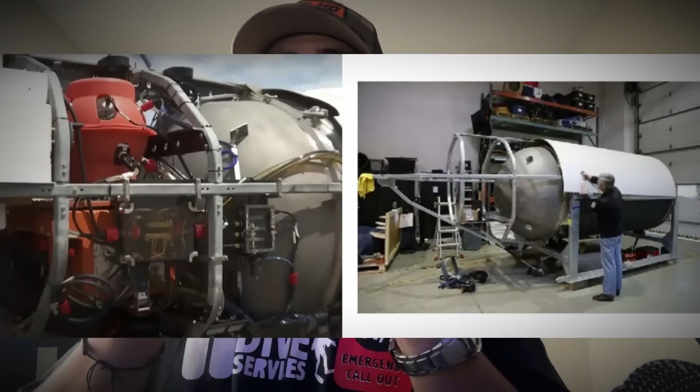Before we get into our investigation, let me explain a little bit about my background. So, I am a commercial diver.

I've worked the past 14 years in the commercial diving industry and the maritime industry. Back in 2018, OceanGate actually reached out to my company directly. They wanted us to essentially provide emergency response dive support for the dives that they were doing in the Puget Sound at the time. From what I recall, at that time, they were doing research with six-gill sharks in the Puget Sound. I remember even back then, they were taking stars like Macklemore out into a submersible. I believe that was the submersible Antipodes at the time. Him and Stockton Rush were down in a submersible a couple hundred feet below the surface in the Puget Sound.

So I really have a unique perspective on what happened here, and it really does hit close to home, not only because they're from the same city as me, but they also reached out to us directly, and we've had contact and communication with them. My personal connection with OceanGate gives me a unique perspective on this Titan tragedy.

Now, this isn't going to be a video about complex engineering details. It's about sharing my experience and shedding light on the events from the perspective of someone who knows the risks and realities of deep sea operations.

As commercial divers, one of the many things that we do is called NDT, non-destructive testing, and that could be anything from ultrasonic thickness testing to visual testing to underwater X-ray inspection on a transducer for the Navy. So there are many tasks that commercial divers do, and we are very familiar with the marine conditions, how different materials react. We often have to put on our investigator hat and try to figure out what went wrong and provide that information in a report to the Navy, Coast Guard, police departments, you name it.

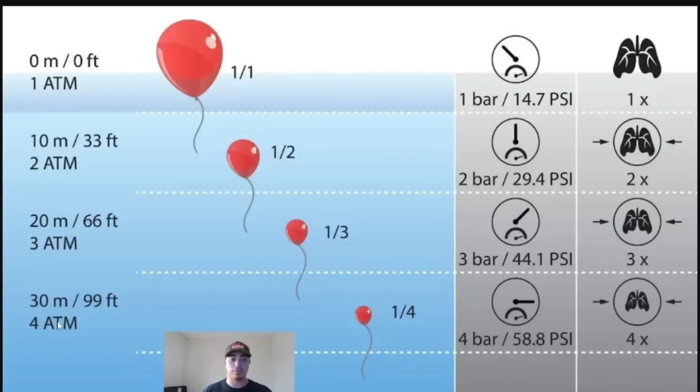So at 4 atmospheres, you're going to have about 4 times the amount of pressure. Now, the Titanic shipwreck was at about 12,500 feet, which is about 6,000 psi, or 400 atmospheres.

So you can imagine that balloon is essentially going to get crushed. Even the material itself—not only is all the air going to get squeezed out of it, but the material itself is going to be compressed.

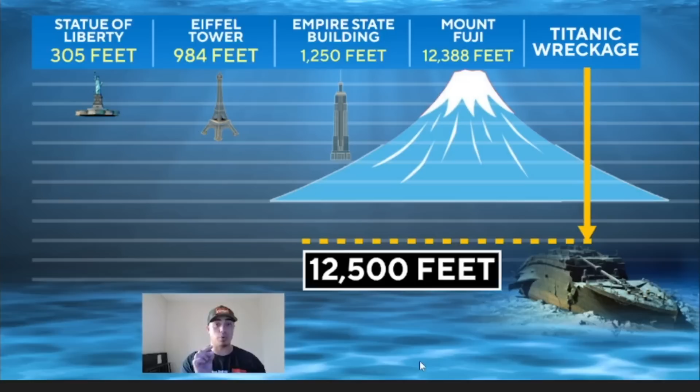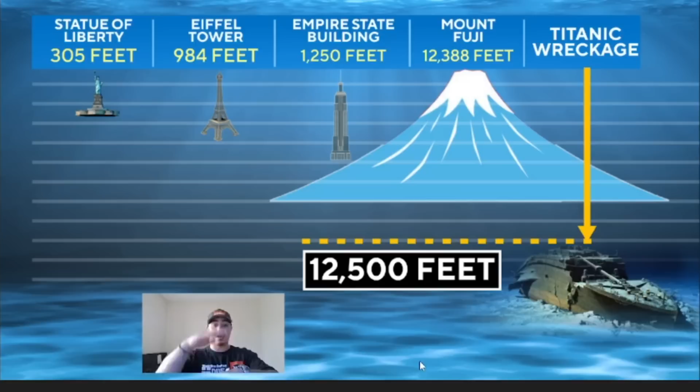At that depth, the human body can't fight off that pressure. Even if you went down there with scuba gear, physically diving to that depth, your skin and everything is just going to be totally compressed. You can't handle that pressure. It's sort of like sticking your hand under a hydraulic press—it's just going to compress everything. That's how much force is behind that amount of water.

So the next thing we're going to look at, they show us this in dive school to help illustrate Boyle's law. In this demonstration they have this traditional diver's suit here—a traditional old school diver helmet and suit setup. A lot of people don't know this, but these old school suits are actually mated to the helmet, so this whole suit is filled with air.

How these work is you have air coming down from a compressor on the dive boat, constantly being pushed through—you can actually hear the air being pushed into the helmet, it's very loud. And you have an exhaust valve right here on your helmet, and that's how you adjust how much air is free flowing out of it.

Essentially what they're going to do is simulate if the hose was cut topside. Inside of this suit, it's going to instantly equalize to the surrounding pressure around it.

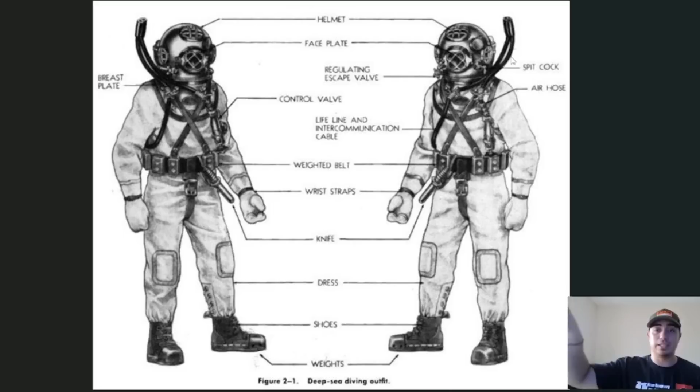Now, to simulate the effects it would have on a human body, they're going to have a dead pig inside of here—this is just for demonstration purposes, since they can't have a human inside. They're going to simulate cutting the hose by opening a valve which releases all the air out, and you'll see what happens with that pressure. So this is Boyle's law here in a nutshell.

So did you guys catch that? The pressure inside of the suit is equal to the surrounding, or ambient, pressure. So he's at 300 feet deep—well, that pressure inside of the suit is going to be 300 feet of pressure, which equates to roughly 135 psi. Okay, that's at 300 feet.

So now that they're at the 300-foot depth, they're going to essentially cut the line. They're going to open this dump valve, and all the pressure inside of here is going to get equalized to the pressure around it at 300 feet. So let's see what happens.

Now, a couple of things here—as you can see, this is a simulation, so it's not instantaneous yet. The air is slowly being released, and it also has to fight its way back up to the surface, which is why it's not as instantaneous as it would be in a real life situation, like with the OceanGate Titan. But here you can see the pig head right here starting to make its way up into the helmet—let's just watch what happens. Remember what I said earlier about human flesh and what it does at pressure.

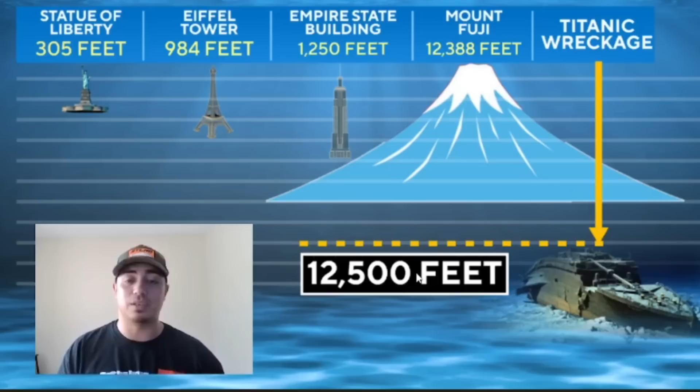Now, did they have warning signs? A lot of people are saying no, they didn't have any warning signs - it wouldn't have made any noise, it would have just snapped and disintegrated. That's what we were told leading up to this.

Now, during this week of investigations and hearings, the NTSB released reports, and we also heard some witness testimony that pretty much confirms, no, they did have warning signs.

Unfortunately, the passengers inside were probably unaware of how severe this was. So, they did have warning signs, and we'll go over that shortly, but let's go over this report from the NTSB - they actually released two material reports.

We're all pretty familiar with the construction of the OceanGate Titan by now, I'm sure. This was actually in the factory when the hull was being manufactured. So how they did this - this is actually once the hull is completed.

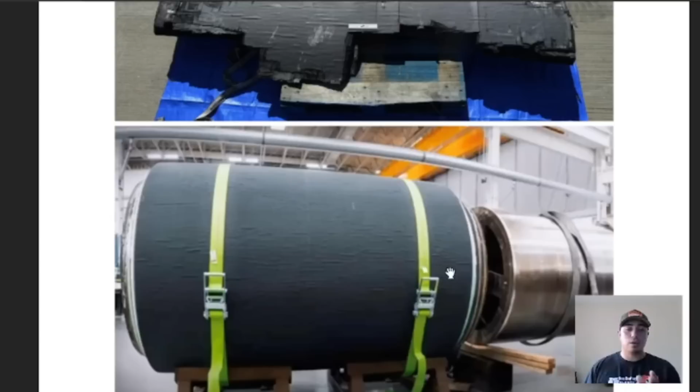They had this stainless tube inside of the hull and then wrapped the hull with carbon fiber, and once it was done being wrapped, they removed the tube. Now, what I didn't know is they did this in five separate layers - five one-inch layers - and you can actually see that here.

Okay, so here's a look at the hull. If you were to cut the edge of the hull off, which they actually did once they completed the manufacturing...

...and kept those ends, which we'll see here shortly, you can actually see the adhesive layers between each of the one-inch wraps of carbon fiber.

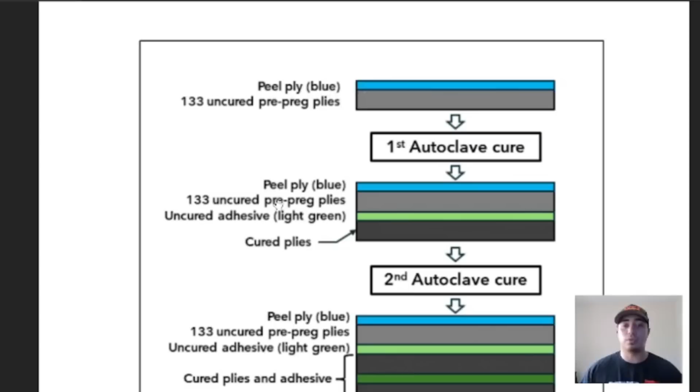So essentially the process was: they would take the carbon fiber, wrap it around that steel tube until it was one inch thick, then apply adhesive, then wrap the next inch, and keep doing that until they had five layers of one-inch thick material.

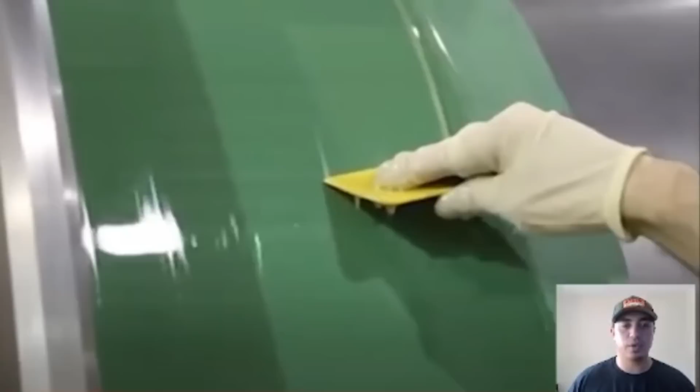Now I'll show you guys something very alarming. This right here is actually showing them applying that adhesive to a layer of carbon fiber, and this is them stringing the carbon fiber on.

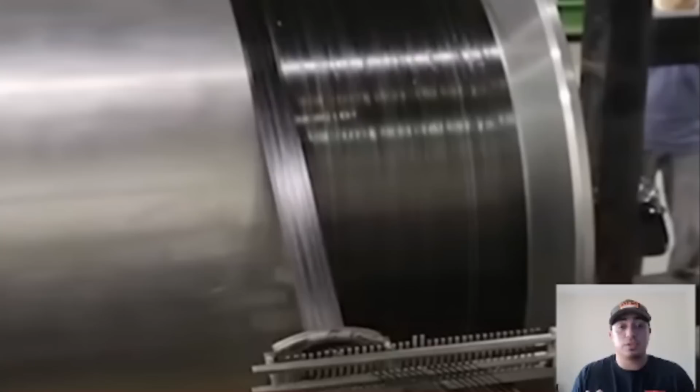Now, this whole time I always thought that they did an X pattern - a crossing pattern with the carbon fiber wraps - but no, they did it in a straight linear pattern, which to me screams a weaker design.

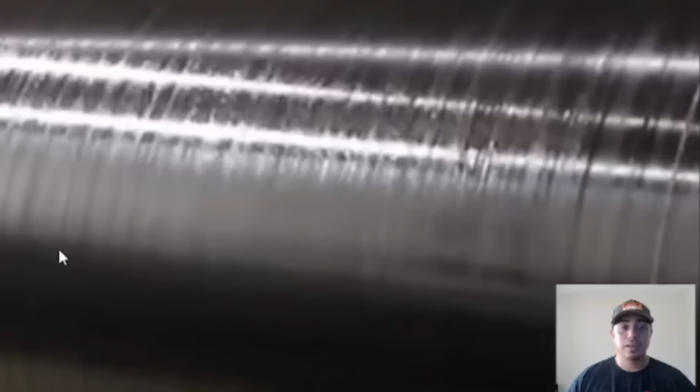Now, you can also imagine that if there was any bit of dust or anything that was not uniform here, as they're wrapping these layers on in a linear fashion, any wrinkle is going to get increased with each layer - I'll show you guys that in a second. See how they're wrapping this in a linear design?

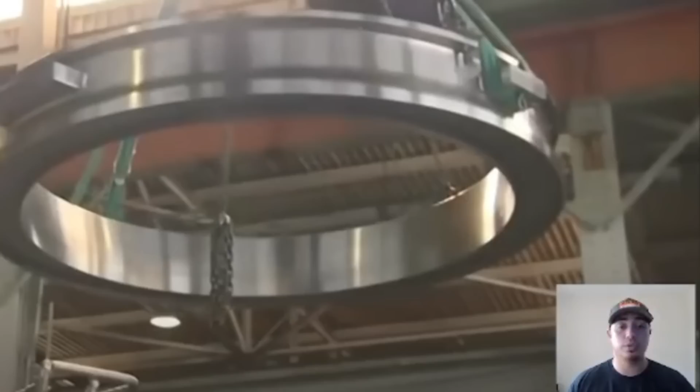Okay, so now this is the titanium ring. There were two titanium rings, one at each end of the submersible, and I am still in shock to hear this - they were only glued on. I thought that they were bolted or secured in some other fashion.

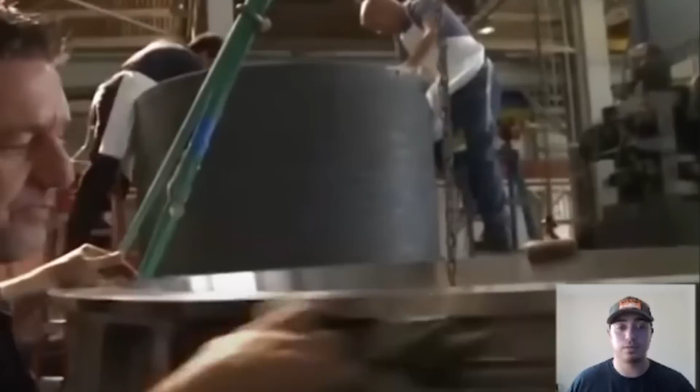It's the glue holding the family together, and we want to make sure it's right. That to me is insane - it's pretty simple, but if we mess it up, there's not a lot of recovery. So here they're applying all of the glue.

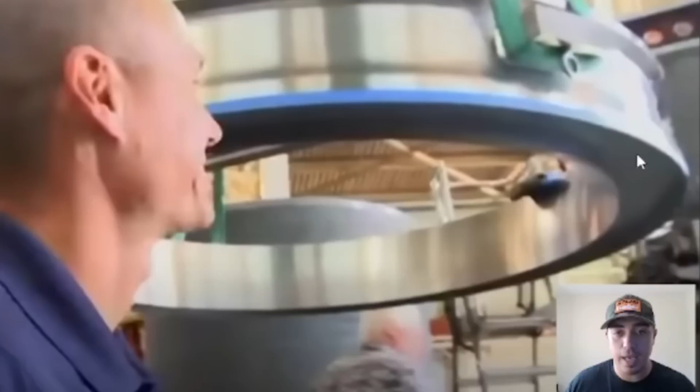So if we look here, we can see inside actually of this C channel. Now remember this because it's going to be very important - each ring is attached the same way. This C channel has a lip on the inside and the outside, and it's not much of a lip.

Common sense tells me that it should be much longer than this - there's not much of an edge there to allow the adhesive to hold on to that carbon fiber.

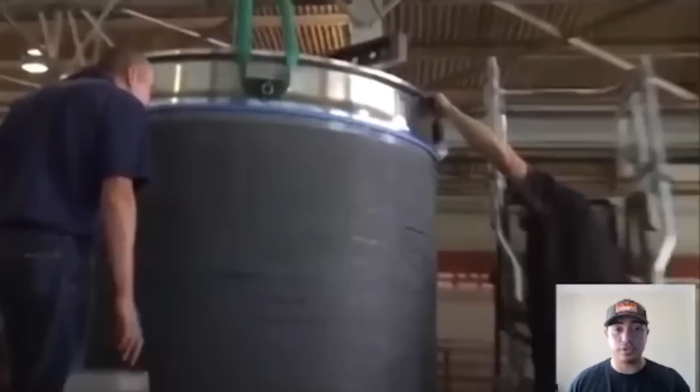Okay, so now they're going to drop this ring on. The glue, the epoxy, is on there, and they just drop the ring on - essentially that's the way that it holds. So let me just pause: knowing that, it is amazing that this thing held together for as long as it did.

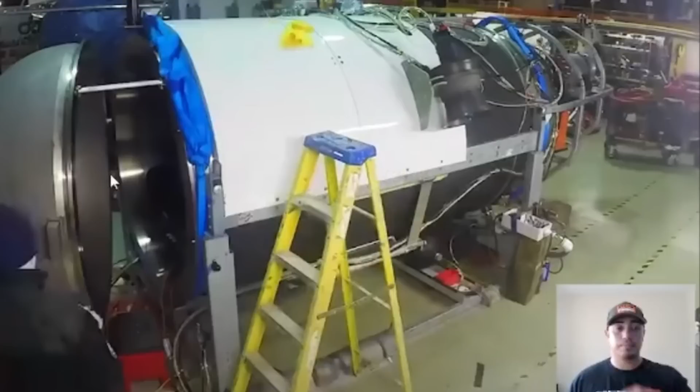This just screams incompetence, negligence, in my opinion. Now, in addition to that, they have titanium domes here on the end. I believe the forward dome is the one that has that large acrylic viewport here. This one has a hinge, I believe, to allow it to swing open and closed. The one in the rear is just bolted on directly to that titanium ring.

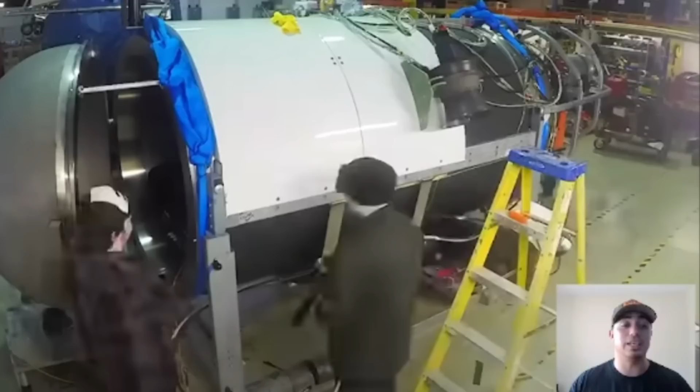We actually heard testimony this week discussing this forward dome right here. It was teeter-tottering when they were trying to bring it back on board. For some reason, there's supposed to be 18 bolts to hold this together, but they actually dove with only 4 of the bolts installed. This titanium dome, believe it or not, weighs 3,500 pounds. So when the submersible slammed forward and landed, it actually sheared all 4 bolts with passengers inside, which is absolutely insane to me that they continued diving this. The amount of negligence involved is just astounding.

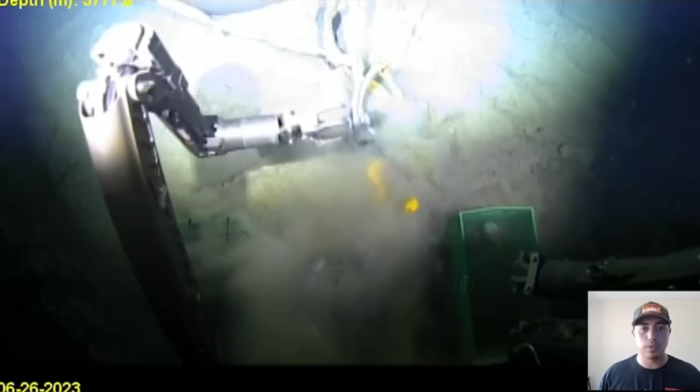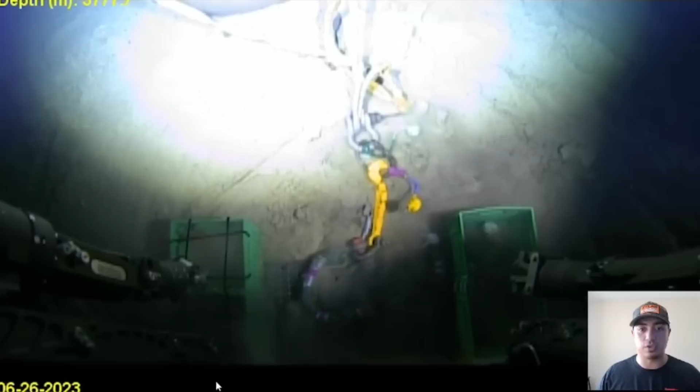Okay, so here we're looking at the ROV. They're getting ready to recover one of the titanium end caps or domes, and they actually have the rigging hooked up already. You can see the quality of this ROV — this is really what the quality of anything going to this depth should be. To be quite frank, the Titan looks pretty recreational compared to this ROV, which is built to go to this depth and beyond.

So we see here that they got their rigging put up. They're getting ready to pull this end cap up, and you can see the rigging points — essentially they're sort of like C clamps that they use, since there's not really any good rigging points here, and they need something simple for the ROV to latch onto and rig to. They just use these clamps that essentially clamp onto the side of the dome, and these arms can get a lot of torque and torque those down pretty tight.

For the longest time, we were actually told that the entire hull disintegrated, right? But that's not what happened. There's actually a lot of hull left down here, and we'll take a look here. So there's actually quite a bit of hull that is left down here. So here's one of the domes — I believe this is the side with the acrylic viewport.

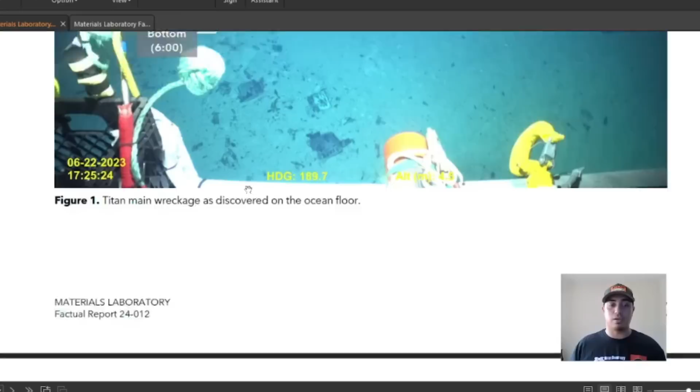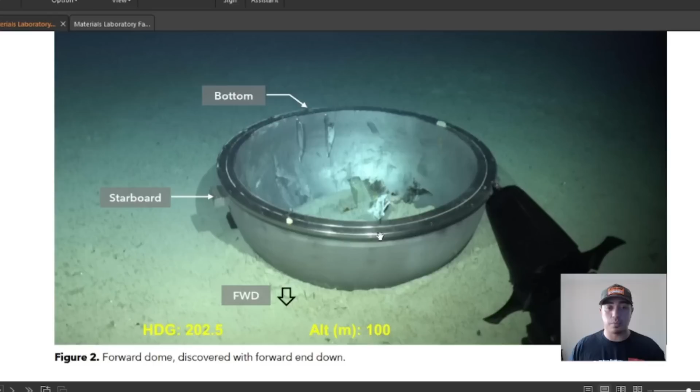Now here, looking at this titanium ring, which is still attached to the dome, you can actually see, it's hard to tell, but those small edges I was telling you guys about on the sides actually sheared off. This is the forward dome, like we mentioned, with debris inside and sand, just from this thing landing, it's going to have a cloud of silt that lands inside of it.

But anyway, moving on, they also saw the tail cone down there. So let's take a look here. They're saying there was a pre-existing separation, so before it went down.

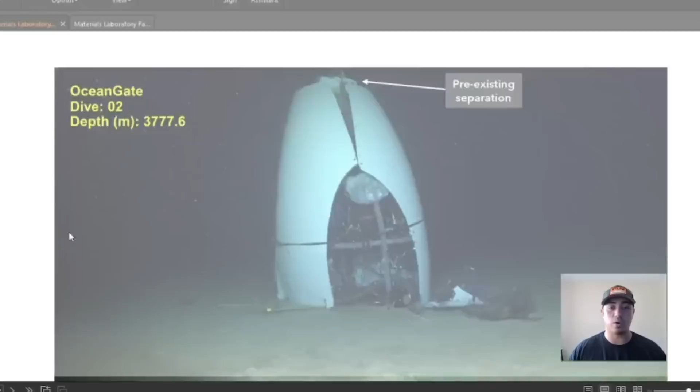Okay, so now this is them with the ROV. They're showing up — now discovering the tail cone during that original search. The tail cone is actually pretty much completely intact. Now why is it completely intact? Well, it wasn't inside of that hull. Anything inside of that pressurized vessel was going to be damaged from the implosion.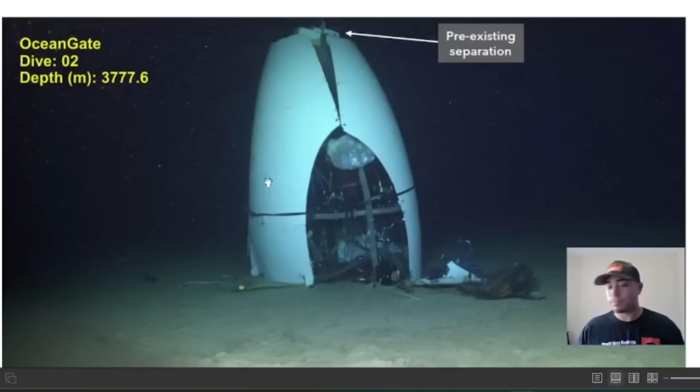Essentially, this is on the outside. This is only attached to the hull by a frame, so none of this here was affected by the implosion because it wasn't actually inside the hull, right? The Coast Guard is saying there was a pre-existing separation, and actually when this thing went down, there was a ratchet strap securing it. Essentially what the white is right here is a protective layer for all the instruments and cords and cables inside this cage, inside the frame. It also acts as a fairing material — not only does it protect everything, but it helps streamline everything so it's nice and smooth.

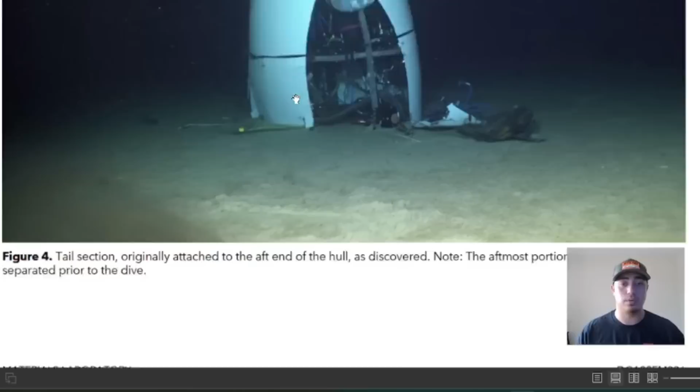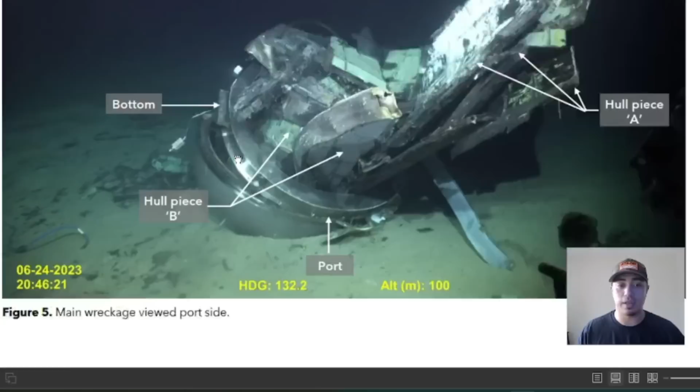Now again, this is the remains of the hull and the aft dome. This is hull piece A, hull piece B, as they're calling it. This is the bottom right here, so this would be kind of towards the top over on this side. Here's a better look at it — what we have is the starboard rail and the port rail, those rails that are actually on the outside of the hull.

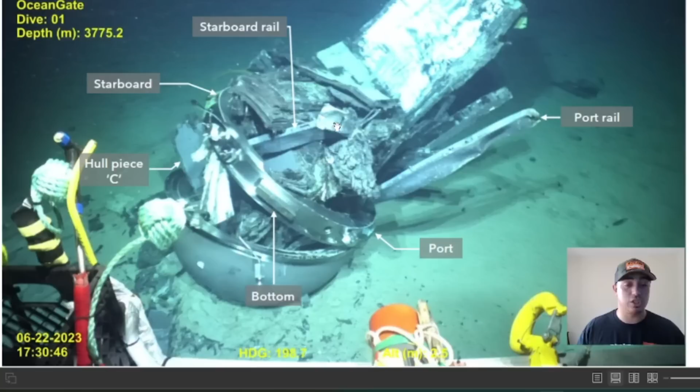Those are actually rails on the outside of the hull, and you can see they just bent and twisted these like it was nothing. This is actually pretty high grade titanium, and they were just able to bend those like nothing. You can imagine how much force was behind this to not only bend and twist this thick metal, but to then shove it inside of the hull like this and suck everything down. It's a pretty immense amount of pressure.

This is a very clear HD video. I'm surprised that we're getting this clear footage, but down at that depth, there's not a lot of living organisms, so the visibility is going to be much, much better.

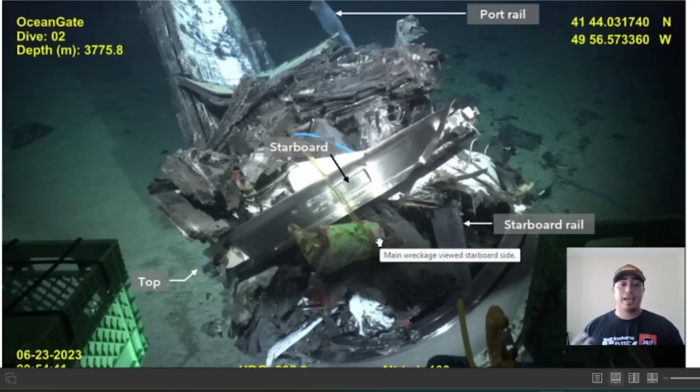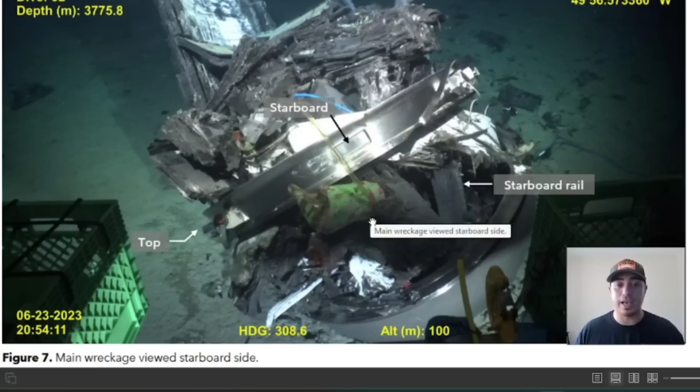This right here, you can see this piece of green with some red splatters on it. Now, what I believe that is, is actually the oxygen cylinders. So inside of the hull, on top of all this, they had pressurized cylinders inside of there, which is pretty insane to think about, because those themselves are somewhat explosive. There's a lot of pressure inside of those, maybe 2 to 3,000 psi of pressure inside of these oxygen tanks. So you can just see how it twisted and warped that metal like it was nothing. There's a little piece of it right there as well.

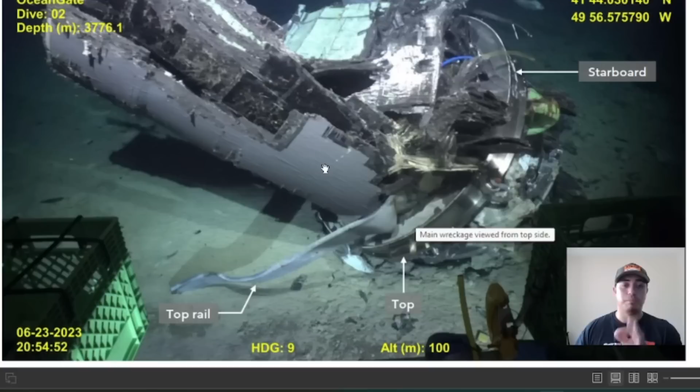There's another look there, and I think at some point they have it labeled. Now, it's incredible to me. This is the next big thing I want to point out here.

As I mentioned in the very beginning, there are different types of non-destructive methods that you can do to inspect things like this hull. You could do an X-ray inspection, you could do a visual inspection.

Well, what happened was you can't do a visual inspection anymore because they covered the outside of the hull with rhino liner. And Stockton Rush actually seemed very proud that he came up with that idea, which is absolutely astounding to me. One, you cannot do a visual inspection, and two, you're adding another layer of coating on top of the carbon fiber, which is going to compress at a different rate than the carbon fiber itself. And the material of the rhino liner is different than the carbon fiber, so it's going to eventually separate. I'm sure that's what happened, and it probably helped increase delamination rates.

So yeah, it's very unfortunate here. You can see this delamination, the separation of all the different plies.

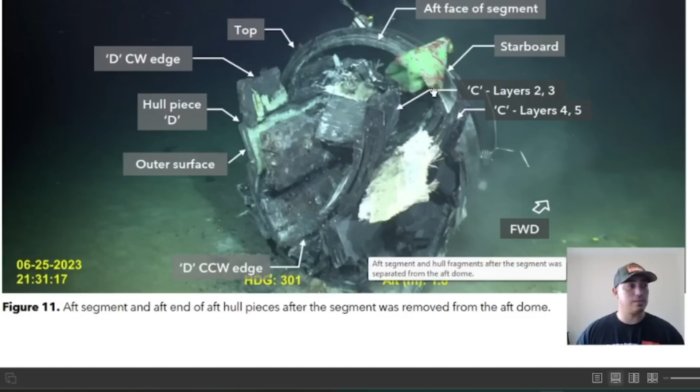And here you can see again the gas cylinder. These are steel gas cylinders. For it to just warp this and bend it like it was nothing, that takes an immense amount of pressure. That's a ton of impact there.

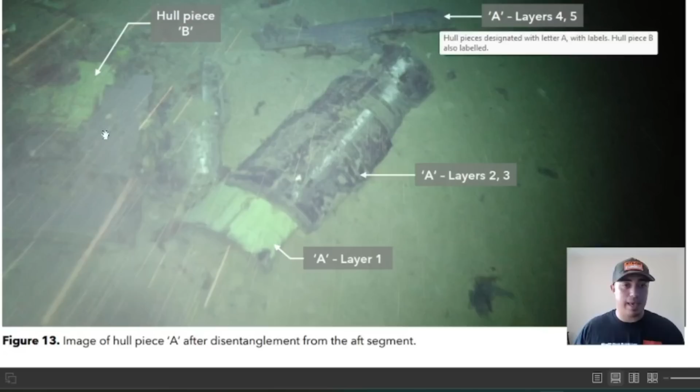So some of these pieces here, like hull piece A, B, layers 2, 3, layers 4, 5. They brought these pieces up, and these are actually being discussed in the NTSB report. Here's just more photos. They wanted to get as many different photos of this as possible, just to show the layers, the pieces.

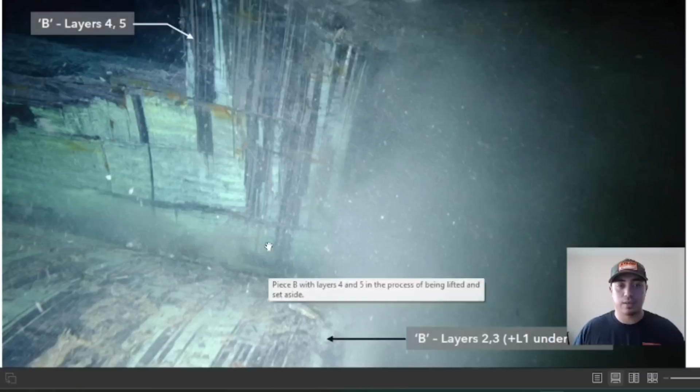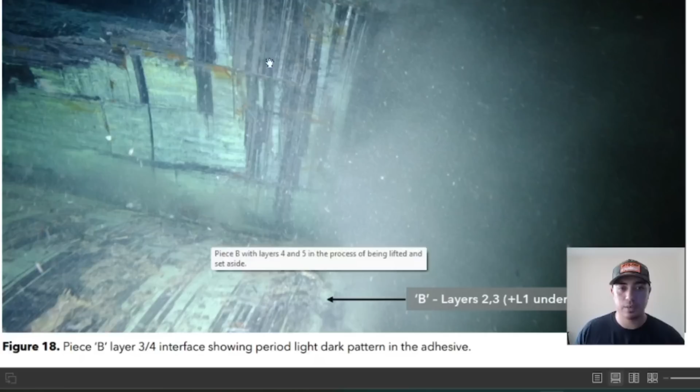So here you can actually see this is a separation of layers right here. Remember that green adhesive that was holding the 1-inch thick layers together? Well, that's what this green is right here. And you can actually see how they just peeled apart. All those strands of carbon fiber, you can see it right there, how it just peeled off.

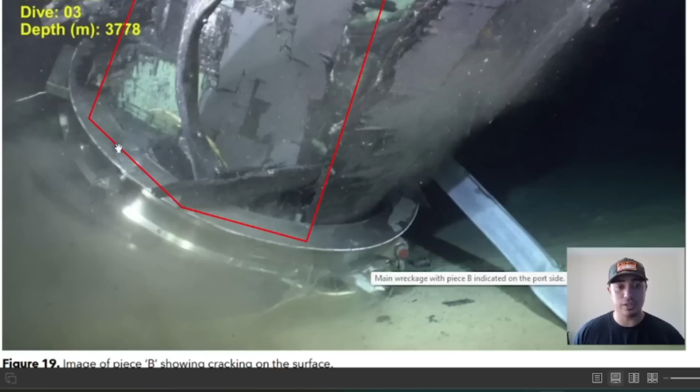Now here you can see the end of the titanium ring, and you can see sections here that are missing that glue adhesive or epoxy. So they have closer photos of that here shortly.

And here's a section of the hull. Was actually, look at this, it has multiple bends in it. So this, I believe, indicates a sudden collapse of the hull. Something definitely caused a collapse. They have the inward bend, outward bend marked.

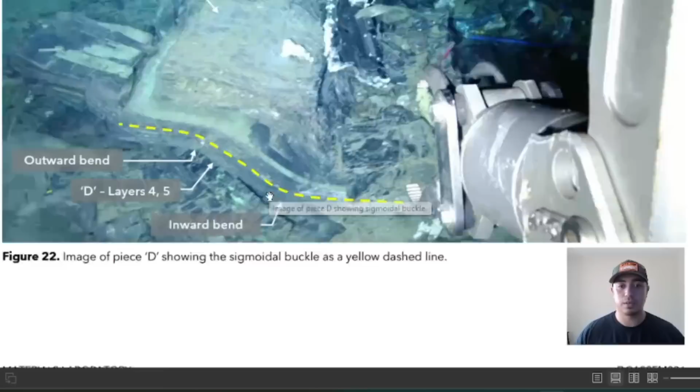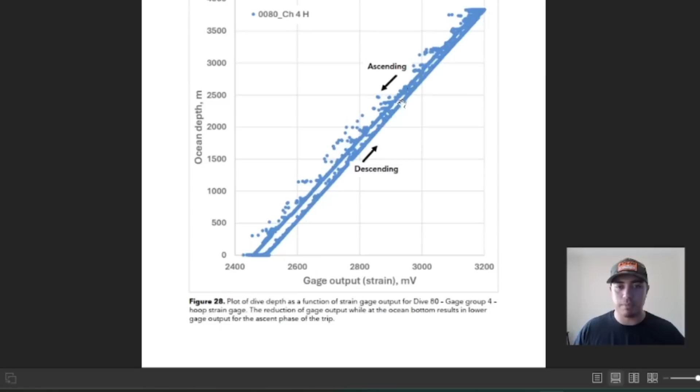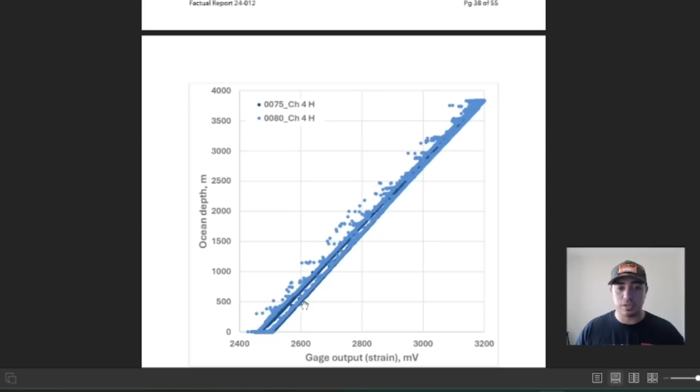So now we can see the difference between dive number 75, which is in dark blue, and dive number 80, which is in light blue. They're, for the most part, pretty parallel, on the same trajectory there. Now, dive number 81 is when we started seeing some changes in the soundings.

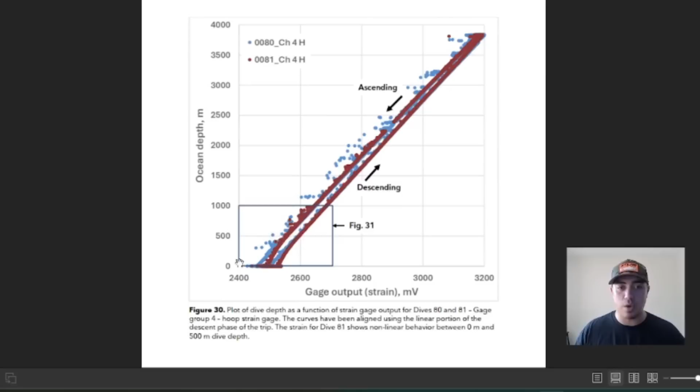Which should have caused a red flag, and this should have been an all stop right here. This vessel should have been all-stopped, and they shouldn't have proceeded without doing a further investigation and figuring out why this was going on. But as we continue going on here, you can see that this actually gets to be more and more severe.

So not only did they not do an all stop and figure out what was going on, they actually continued, and the problem ended up getting worse and worse, as you can see here.

Now, us as divers, we know that the biggest change is going to be in that first 100 feet. You're going from atmospheric pressure, then you're instantly going to a few atmospheres underwater. So you can see here at 100 meters, that's where that biggest change is going to be. And any diver or anyone in the maritime industry, especially in a submersible industry like this, they know that this is complete negligence, in my opinion.

Now you can see here that these soundings over time, over those last few dives, this is leading up to the dive. So when I say that they had warnings and the signs were there, well, this is what I mean. The signs were there. You can hear these on the dives.

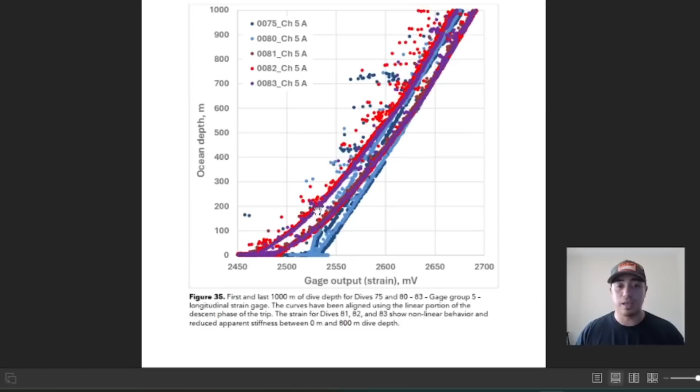And according to one of the witnesses this week, they pretty much said that Stockton was just kind of ignoring it and saying, well, brace yourself, you're going to hear some big bangs. And that's exactly what they were hearing. And those bangs were increasing with each dive leading up to this tragedy.

Because we all know that the weather when these tragedies were happening—I don't know if you guys know, but the weather when they were trying to do this last mission was actually pretty rough. So this thing was actually bouncing up and down, getting bounced around.

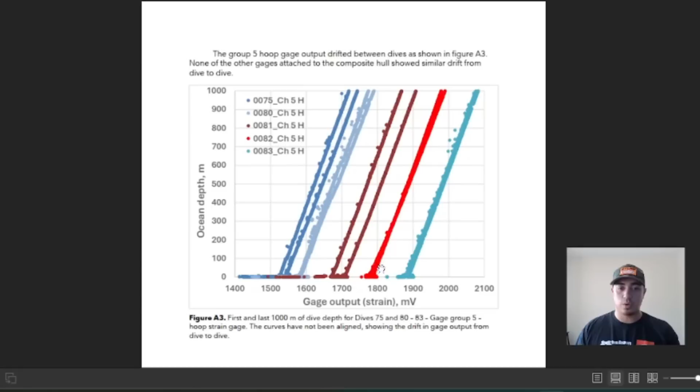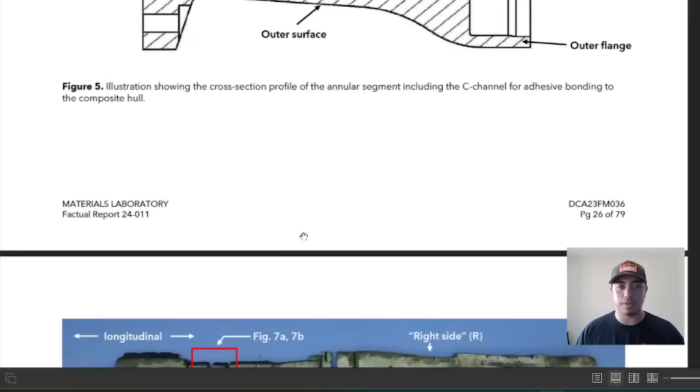And here we'll just take a quick look at these materials. This is from the NTSB report. So these are coupons here that they had cut from those samples. I believe this is sample B. They actually did a field cut here, cut out sections and took photographs of the separation of this layer. Now this is just one layer—remember how they had the green adhesive there.

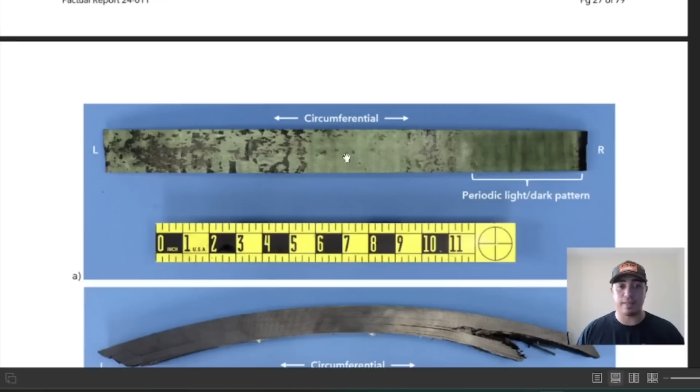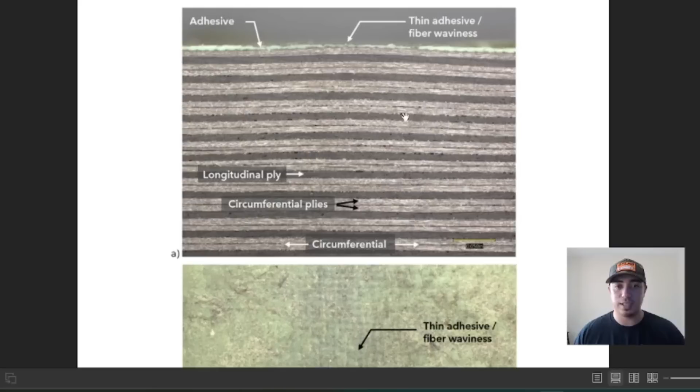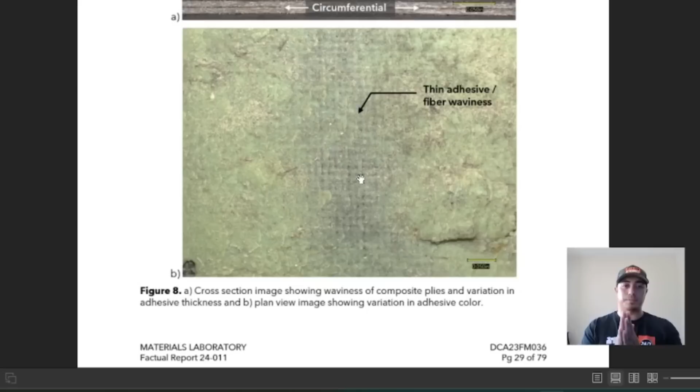Now here's where things start to get concerning. This is one of the layers, and between the layers they have multiple numbers of plies. This right here is just one inch—this is just one layer. You can see some of the waviness here, and you can also see a difference in thickness of the adhesive. And here they also are mentioning the thin adhesive right here, which is going to reduce the amount of glue right between the two layers.

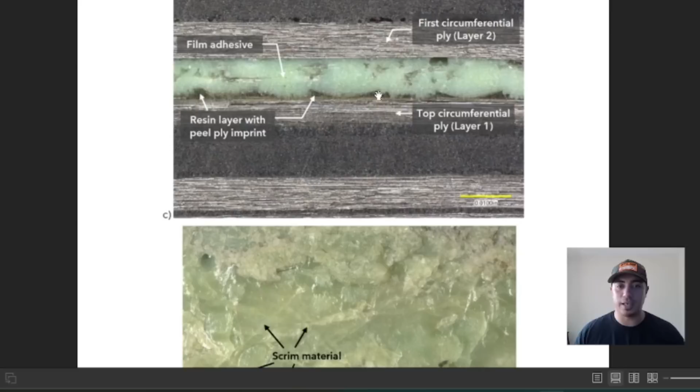Now here, this is a coupon that was cut out, showing the adhesive between multiple layers. Some very concerning things here—you can actually see some gaps between the adhesive, and I think what they're saying these spots right here are is actually the carbon fiber peeling up and separating, because see how those are kind of uniform dimensions there.

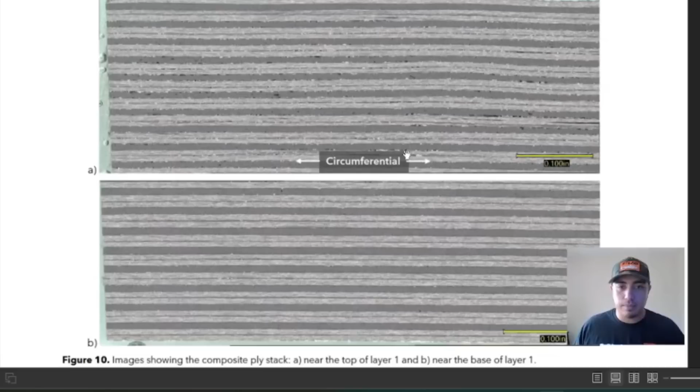Okay, so here's another look at some of the layers, and you can actually see some of the waviness here. Now that's not too concerning. Let's continue on here at some of the other concerns.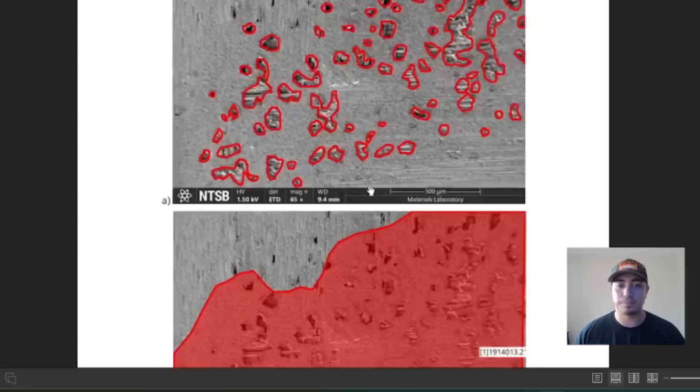Now these are glossy regions. There's a void, so there's an obvious void right there where there wasn't any good adhesive, right? That's all going to be air that's in there.

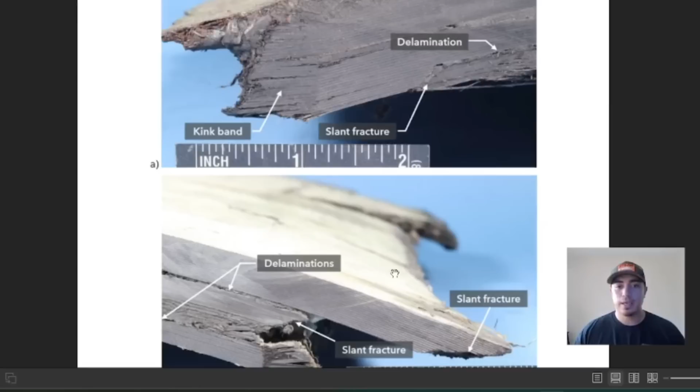Now these are fractures. There's delamination. It sounded like there was pre-existing delamination.

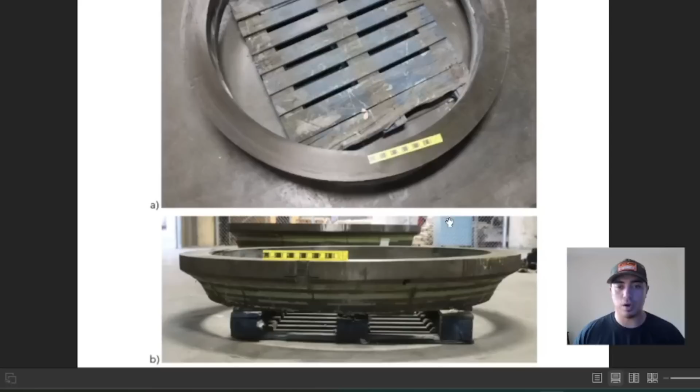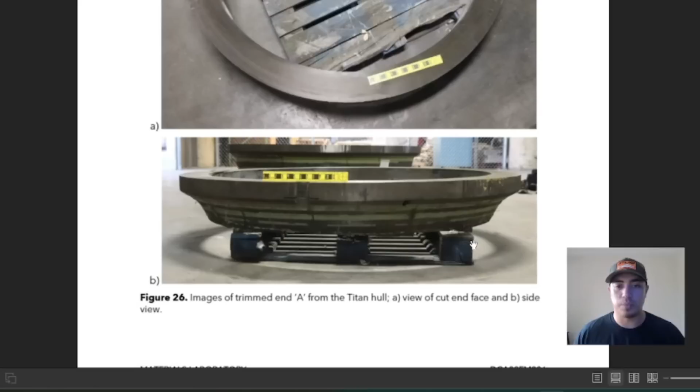Now when they were constructing this, as I mentioned earlier, they cut off the ends of the carbon fiber tube, so they had a nice smooth hole for something to glue to. And here you can actually see that there was 1, 2, 3, 4, 5 layers right here. So as they were wrapping the layers, they moved inward closer with each layer, and then they cut it off.

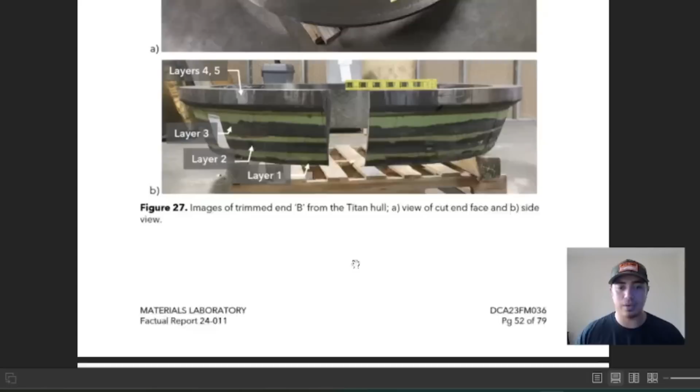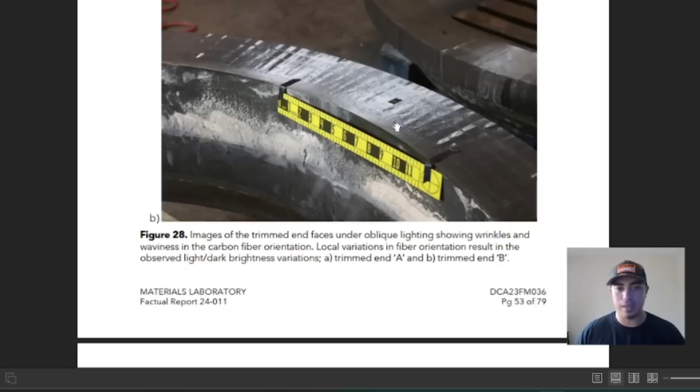Now they actually saved these, and I'm glad that they did, because this is sort of a smoking gun, and you can see what happened and what went wrong. And you know, I'm not an expert or an engineer in the process of manufacturing with carbon fiber, right? But there's some very common sense things that we could point out.

So here there's an obvious void in the adhesive. Here there's a very obvious wrinkling. And what they did was, when they would reach that layer, so this is the end of a 1-inch layer, there was a bump. So when they finished that, there was a bump right here.

What they did was grind everything down. So you can see that they mentioned right here that they grinded down the tops of those, which essentially would separate that ply, and it would reduce the strength of that ply, and then they would just throw some adhesive on top of it, start the next layer, which is extremely concerning to me.

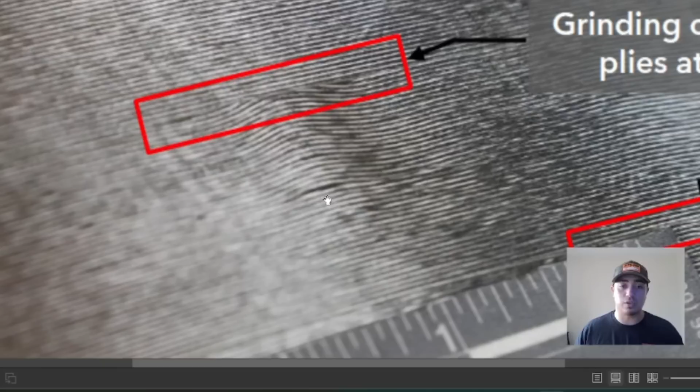Now the problem didn't start right here. The problem actually started way down here and then increased gradually.

So here you can get a much better idea of what we've been talking about here. So 1, 2, 3, 4, 5 layers, all 1-inch thick layers with that adhesive between, and then each one of these is going to have plies in between it, right? It's made up of lots of plies there.

Now here you can see these are extremely concerning to me. So it started off pretty smooth, but of course, as you continue to pile up those small layers of carbon fiber, well, you can see what happens here. Look at these major wrinkles. I mean, this one almost comes inward and then comes back out, and they ended up just cutting that off.

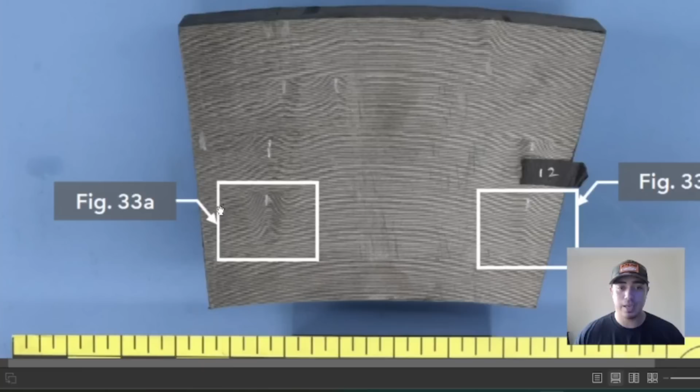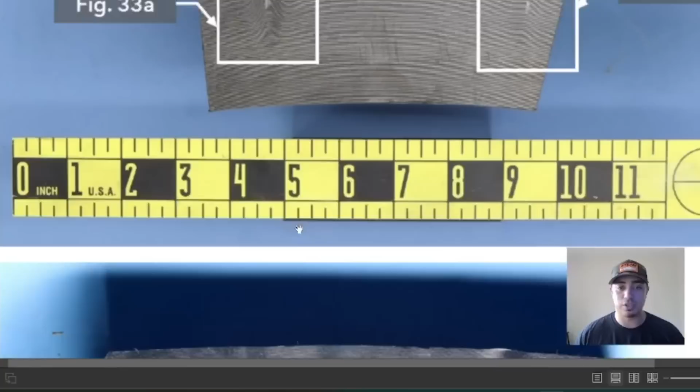Then restarting with the fresh layers, cutting it off, grinding it down, making sure it's all nice and smooth, and then starting again. But what they're doing is actually cutting the strands, so it's an incomplete strand and an incomplete ply. Here's a better look at those.

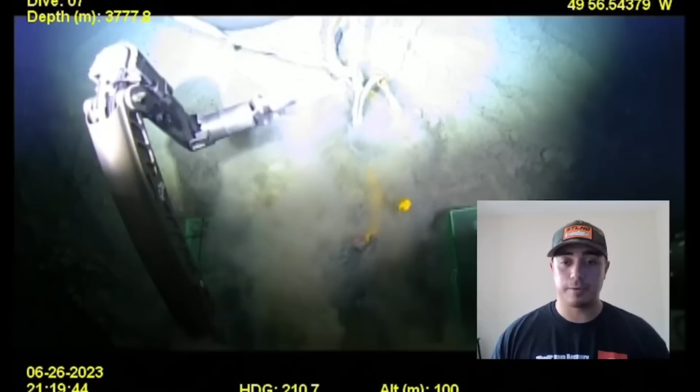Yeah, so extremely concerning stuff. So my heart really goes out to everyone here involved in this tragedy, the victims, and especially their families. They didn't deserve to go out this way, and you know, a lot of this could have been prevented.

Would it have slowed down progress? Yes, maybe, but you know, these things can be done safely. James Cameron has proved that on numerous times. He went to about twice this depth on a solo mission. So these things can be done safely, but there are rules and processes involved to make sure that that happens.

So I hope that you guys enjoyed this, and it helped illustrate from a diver's perspective what's going on, why there was an implosion, and kind of helps illustrate how much pressure there actually is involved down here, because it's sort of hard to imagine when you're not faced with that on a daily basis, or some people are never in life faced with these sort of pressures. So I hope that gave you a unique perspective from a commercial diver and maritime professional's point of view.